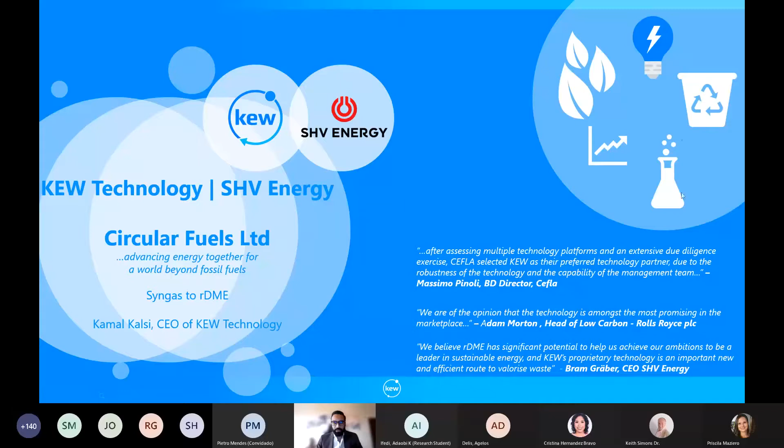Next slide, please. Okay, so very briefly, KEW Technology - we're a pressurized gasification technology company, and our mission is to convert waste and lower grade feedstocks, agricultural biomasses and so on, which are a very important theme in this discussion regarding Brazil, into a high quality syngas vector, a gas containing hydrogen and CO, which forms the building block for doing many other things.

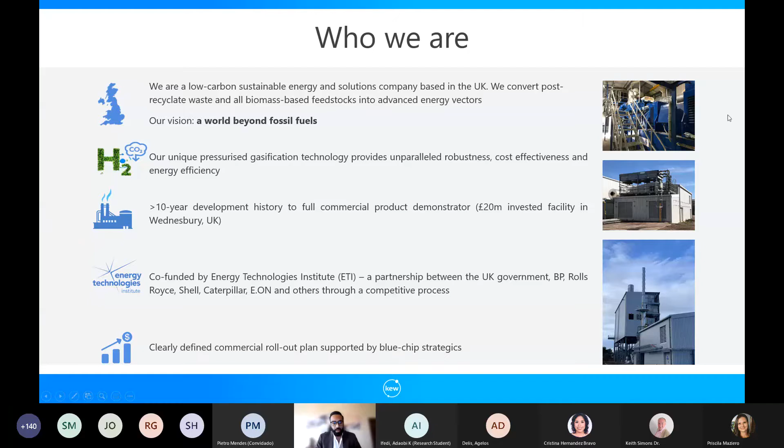We have a 10-year history that has culminated in the development of a full-scale product demonstrator in Wednesbury, near Birmingham in the UK. We've had quite a long history - next slide, please - where we were supported quite heavily by the UK government in the beginning to construct a full-scale demonstrator, because gasification as a technology route is very interesting: if you're using a high biogenic content it opens a route for carbon capture, and with even a reasonable degree of carbon capture, one can start producing negative carbon fuels.

This makes it extremely attractive, because some things which are impossible to decarbonize completely - well, a negative carbon fuel really does offset that. So we've worked very heavily, in parallel with the development of the technology itself, on understanding the market and the general flow of policy and feedstocks, and which is the right product. Are you talking about hydrogen? Are you talking about distillate fuels and making secondary fuels, methanol, ethanol? Are you talking about LPG and LPG substitutes? We've had the good fortune of working heavily across these different feedstock types and end use types, analyzing them in detail to really try and converge the technology and the product solution into what is attractive ultimately for the market.

As part of all of this, we formed some very good relationships, commercial relationships with major players - SHV Energy being our most recent relationship. We have a joint venture with SHV Energy called Circular Fuels Limited. The objective of Circular Fuels Limited is to develop commercial scale bulk DME production plants using waste and low grade biomasses as a starting point. If we go to the next slide, please.

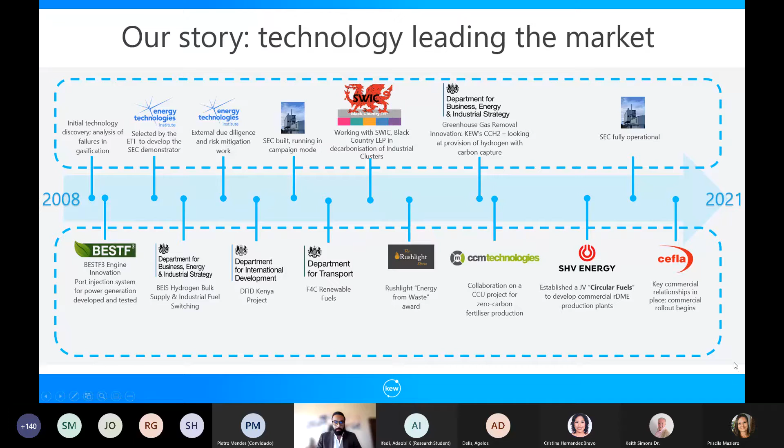So really, in terms of where we sit as a technology, we're in between two parallels. The first one being decarbonization - clearly decarbonization and providing lower carbon feedstocks and fuels is a core part of what we do. But we also sit on the other side, which is waste reduction. Waste is something that touches everybody, and this has been a very core element. Somebody mentioned earlier in the session about biomass and how we have to be careful with how biomass is used for fuel production, because it could lead to deforestation.

We are very much of the view that the feedstock we begin with has to be a waste, or an end-of-life product, whether it's agricultural waste or a municipal waste derivative product. It really has to start from that, and therefore you do not interfere with the food sector - you do not interfere with deforestation, but rather you take something that right now people are throwing away in the bin, so to speak. So really we straddle these two sectors. Next slide, please.

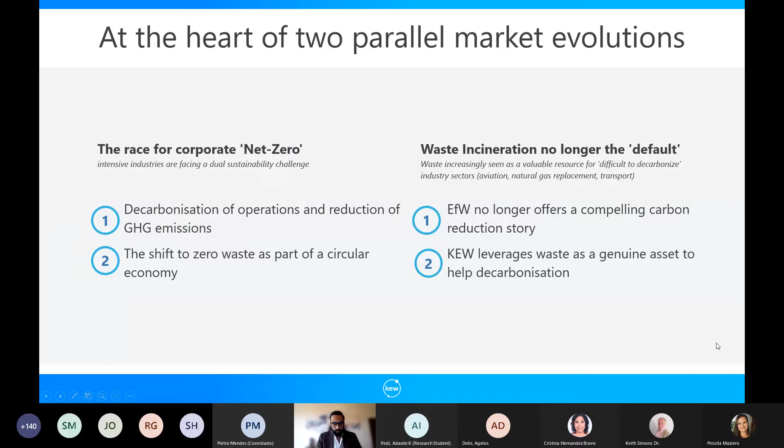So what we are able to do is take these low grade feedstocks and biomass and convert them into hydrogen and CO production gas. What is unique about the technology and the way we do it is that our gasification system is a high pressure approach, which at a smaller scale is a fairly unique proposition. There are larger coal gasification plants, of course, but those are fossil based. What that does for the technology is it allows not only some technical advantages - converting lots of different types of waste into a high quality gas vector that we can then convert into other things - but it's also around the delivery model.

So how do you build what is effectively a fairly complex plant anywhere in the world and make it cost effective? One of the key strengths of the technology is...

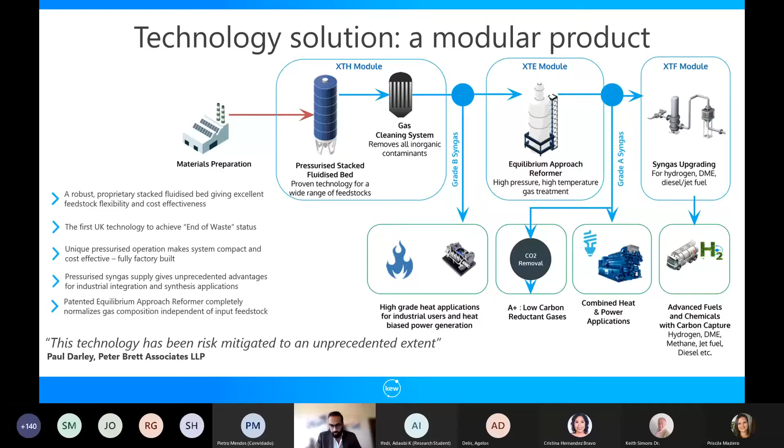Really about being able to take a very variable feedstock like waste, because one minute you have plastic, then biomass, then something else that changes, and turn it into a very homogeneous output product.

That technology, the manifestation of it, is in our plant in the UK. This is the facility in the pictures you see in Birmingham, where we have a full-scale demonstrator. As a result, we can do a lot of work proving operation all the way to a fuel end product, an end-to-end demonstration of the entire process, which acts as a key risk mitigation element in demonstrating the viability of these technologies to solve these problems.

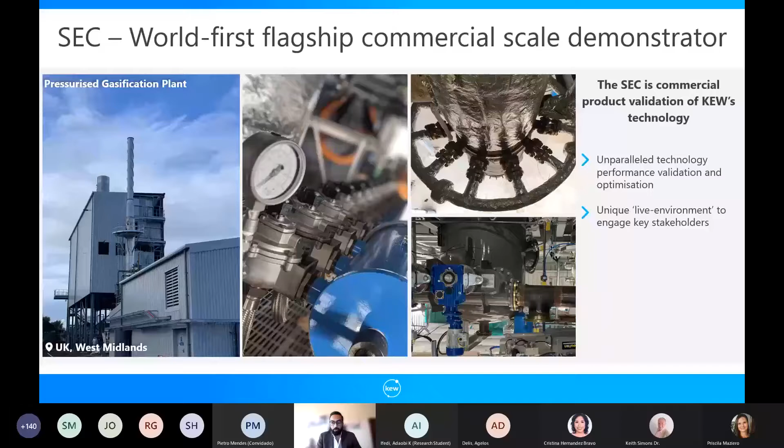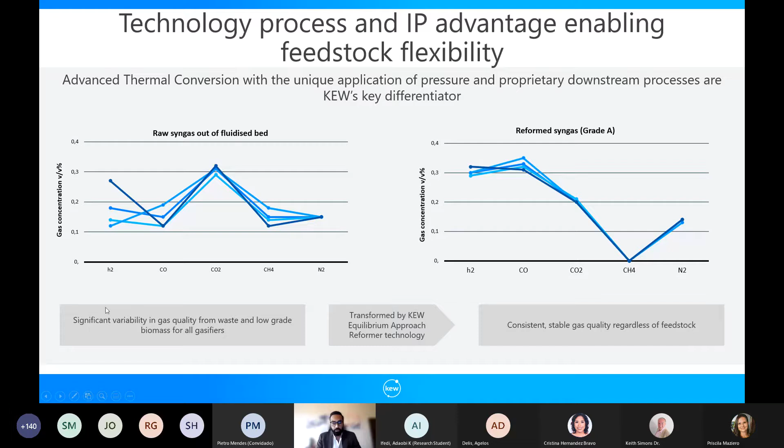This was just a very quick demonstration, and this is really key, especially in context of the discussions we've been having. The technology lends itself to using everything from sludges, sewage sludges, digestates from anaerobic digestion, refuse-derived fuel from municipal waste, or commercial and industrial wastes. We can use woody biomasses too, as long as the sustainability criteria is correct, so it's more of a commercial problem than a technical one.

We can also use other lower grade wastes, which at the moment are a struggle to do something with - for example, category 3 animal waste, hazardous wastes, which today pose health problems. The advantage of the solution is that we can take any of these things and convert them into a high value end vector.

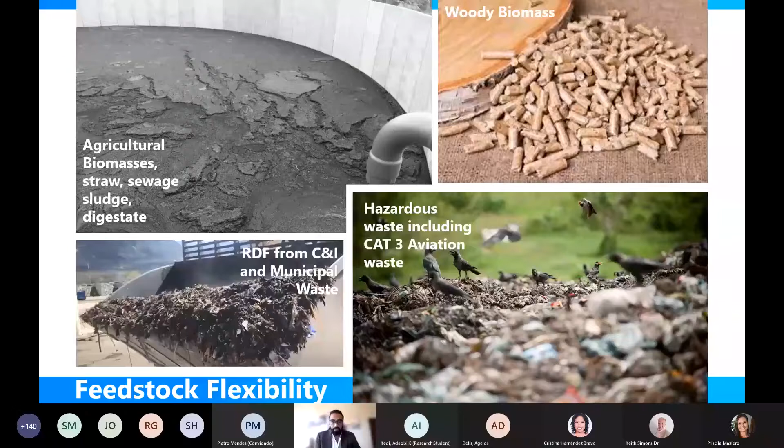As we'll see on the next slide, what is very interesting for us, and our primary focus, is on waste. Brazil generates about 80 million tons of municipal solid waste annually, and about 40% of that - quite staggering - is in controlled landfill open dump, and about 58% is in sanitary landfill. So there is a lot of landfill in Brazil, in a nutshell, and therefore a very strong need to do something better.

What we're doing right now is taking kilojoules of energy and just putting them into the ground, which are then releasing methane, a very powerful greenhouse gas, causing further damage. So there's a lot of wasted energy here, and what we're suggesting is, look, we can tap into this - we can take this and turn it into a fuel vector that cuts across.

Even though refuse-derived fuel has an organic proportion - in Brazil it'll be about 60 to 70% - the reality is, yes, there's a small fossil component to it. But a lot of it is a renewable feedstock, of renewable origin, and therefore the fuel you can produce at the end has a large renewable component. You're able to do that with a waste stream that already exists, is already there - it's just not being put in the right place.

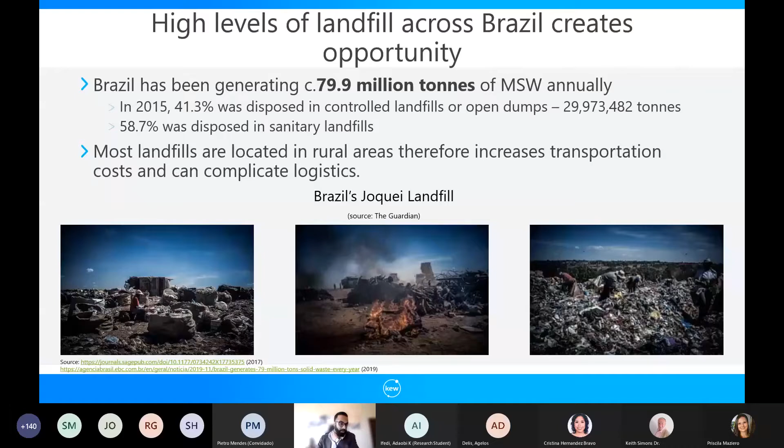If we look at the next slide, you can see there are other opportunities in Brazil as well, from agricultural residues, crop residues, sugarcane, soya, eucalyptus. I think the unique thing about the conversion route we're proposing is that, as opposed to anaerobic digestion or ethanol production where the feedstock specification has to be very tight, relying on a very specific process and feedstock to produce the end product, in our case the process is very omnivorous.

We're not reliant on cellulosic or non-cellulosic biomasses, for example, for our process - we'll just take anything and everything. That makes it very effective and very flexible to deploy in a distributed format. It's a very large country, and the production of these feedstocks is geographically very dispersed, so having a technology that can deal with that is quite essential.

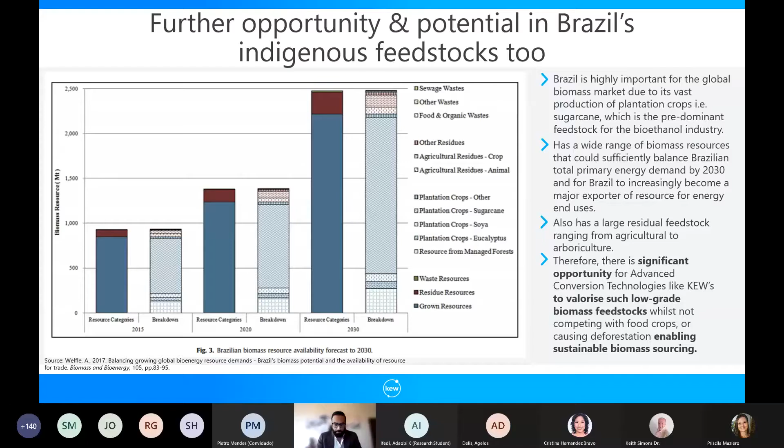Waste is an excellent feedstock. There's a lot of waste biomass that is available, and that's also a very good feedstock. It's sitting there, it's energy that currently right now people are either burning or burying. So there is a better way of dealing with this.

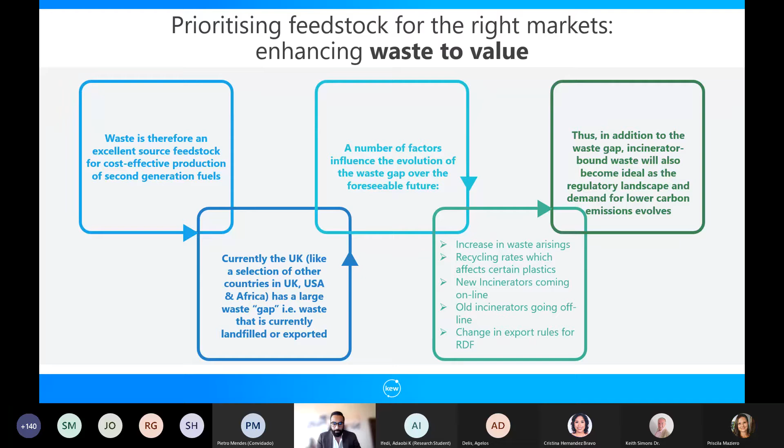This is just a short note on incineration. Obviously a lot in Europe especially, incineration is a primary mechanism for disposal of these wastes. But what we're finding right now is that it's increasingly being viewed as just a stopgap solution, and there is a better way. What we're proposing here is the better way of doing it.

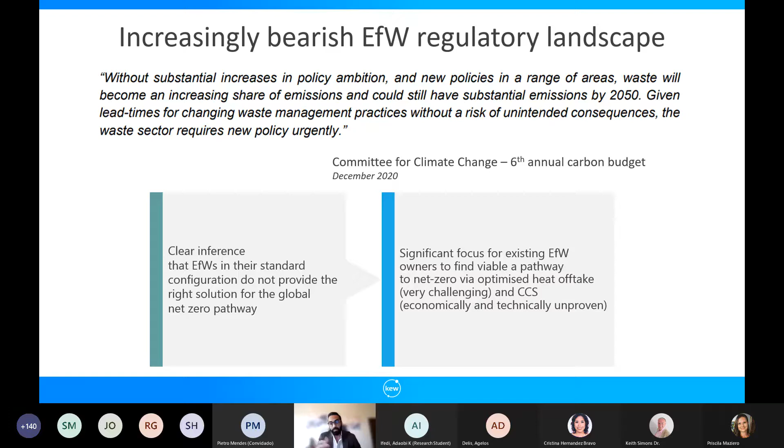Even the best incineration today takes in waste and makes electricity. Really, I would say the approach here is damage limitation — people are making electricity as a way of limiting the damage. What we're saying is, why are you making electricity when you can take chemical energy in your feedstock and make chemical energy coming out the other end?

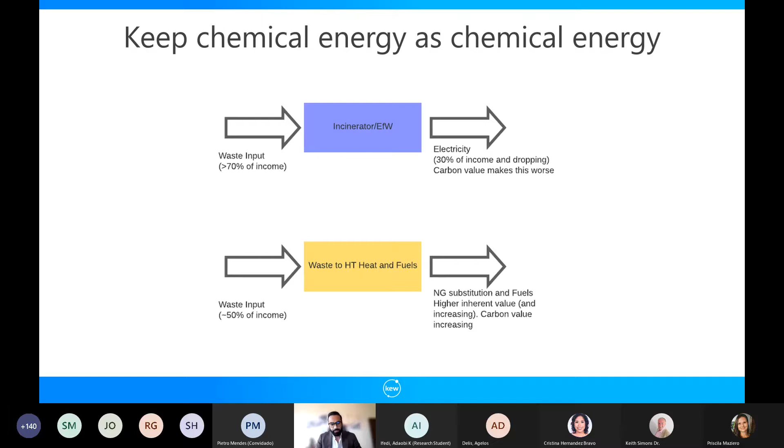Recycling and reuse is there, and that has to be there — it's a primary way of how we're going to go forward. But instead of going to recovery next, we're saying conversion is an intermediate and better way of using this energy than other approaches.

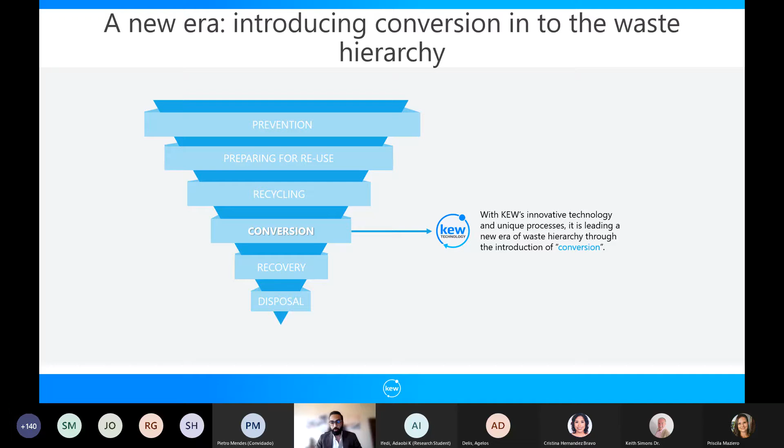This is a very important point regarding catchment areas and the relative scale of things. The typical oil and gas world of producing fuels is to make everything as big and as expansive as possible. Now the reality of how waste and biomass is produced is that the catchment areas are generally a lot more limited — you might have 200,000 to 300,000 tons.

This is a European model — you might have a bit more, a bit less in other areas, but generally the scale of your project, or the scale of fuel you produce in a single facility, is limited by the amount of feedstock you can sensibly collect. There's no point transporting waste or biomass 1,000 miles to a central facility. That really limits the scale of facility you produce, and therefore governs what product you want to be producing at that facility.

Through a very long analysis we've done, we find that dimethyl ether, DME, is an extremely good product to produce this way, because the process is very simple, very effective, very efficient, but also it lends itself to being scale efficient. Producing distillates, jet fuel for example, from this sort of process requires a much larger scale, which makes projects a lot more difficult, especially at this early stage.

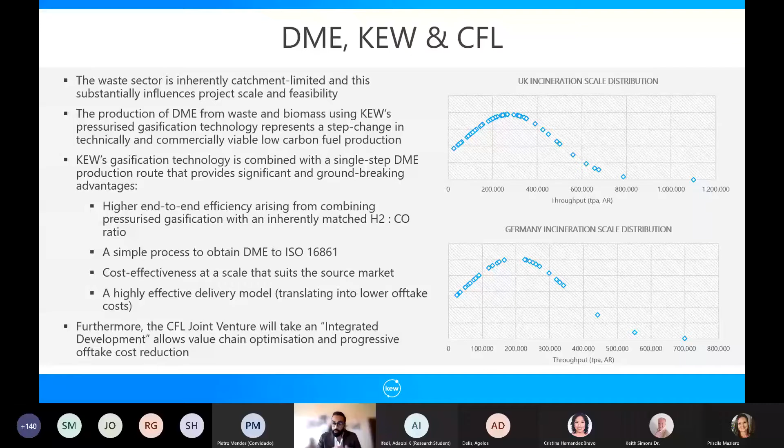DME is extremely important to LPG. In a nutshell, the key thing behind the plants we're proposing is that the DME being produced is a direct blend stock for LPG, and it's a bulk supply — not an offshoot of 3 or 5% of overall production, but plants focused and dedicated on producing DME. This is the backbone behind our joint venture with SHV Energy, which is Circular Fuels Limited. This approach allows quite an innovative way of doing it, and initially you can blend up to 20%, that's the target, eventually going to a much higher blend level.

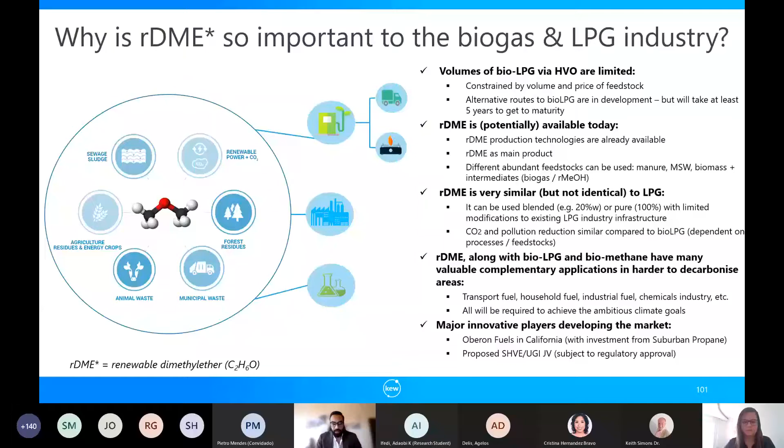The joint venture we have with SHV Energy — the objective is to produce numerous plants using waste feedstocks to produce the end product, DME. We're starting with the first project, which is currently in development. We've already completed a FEED study and are doing the next stage, in the UK. But our remit is global, and we'll be looking to develop further projects, especially in places like Brazil, where the feedstock is there, the energy is there — we just need to convert it in the right way.

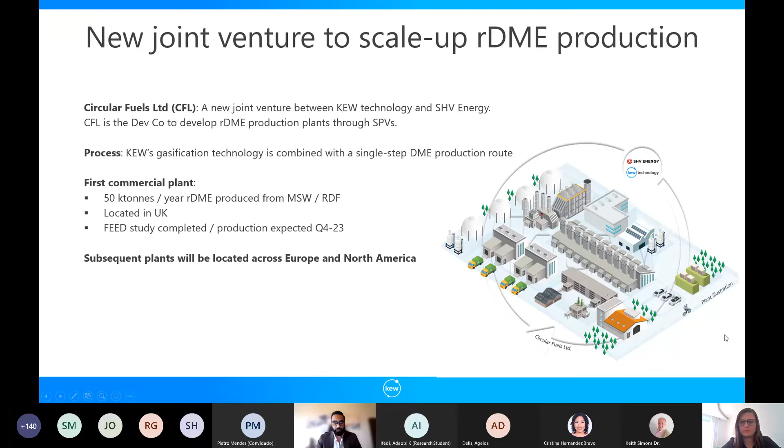To summarize, there is a very strong desire for circular economy, and we believe this solution of taking waste and converting it into a low carbon fuel solution ticks all the boxes and can also be economically viable. Our objective is fossil parity at the very least — we believe we can do better. Thank you.

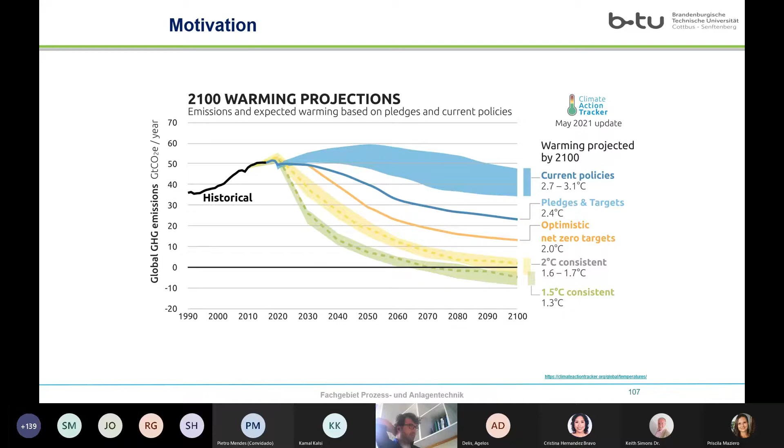The main reason that we are still talking about opportunities of using Syngas for various products is, as you see here, the predictions or projections in terms of global warming or climate change that need to be tackled somehow. One of the first reasons is the growth of the population, which leads further to an increase in energy consumption, and these follow a very close pattern.

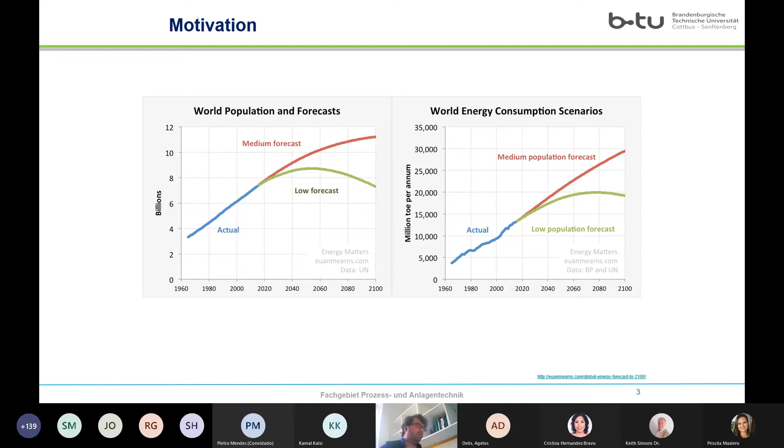For this reason, many policymakers are asking industry to improve their operation in terms of energy demand, which needs to be reduced, the dependency on fossil fuels, the reduction of greenhouse gas emissions, and increasing energy efficiency.

Now these numbers are from the former climate action plan from the European Commission, which I've seen has been updated by the Commission yesterday. For example, for the reduction in greenhouse gas, I've seen it has increased from 40 to 55 percent by 2030. So these numbers may not be accurate anymore - this is still not decided, it's just a proposal by the Commission, but things may change in the future. So we have quite tight targets for 2030 currently, which may be even worse in the future.

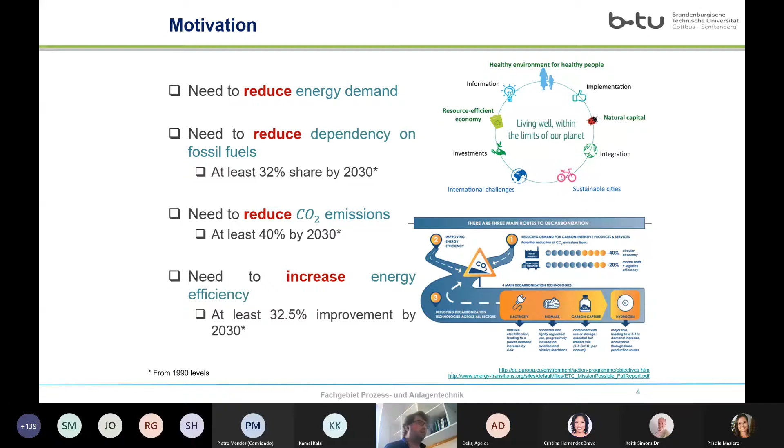Now, the main routes for achieving these targets towards decarbonization are split into three parts, as you can see in the lower part of the figure. First, one option would be to reduce the demand for carbon-intensive products and services. Second, to improve energy efficiency. Third, to deploy decarbonization technologies across all sectors of the economy.

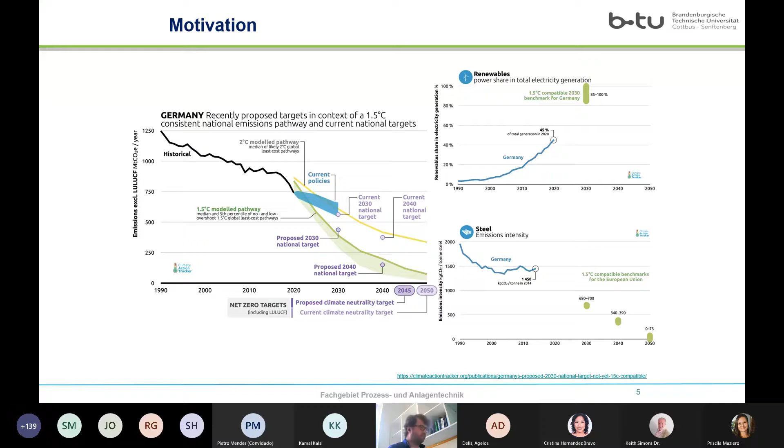So now one solution to achieve these targets would be to implement renewable energy towards low carbon energy systems, low carbon industrial systems as well. The issue with this is that in many cases the supply varies, so it's intermittent, and the best examples are solar and wind, which are very easy to understand. This intermittent supply means there's always going to be some mismatch between the supply and the demand for this renewable energy.

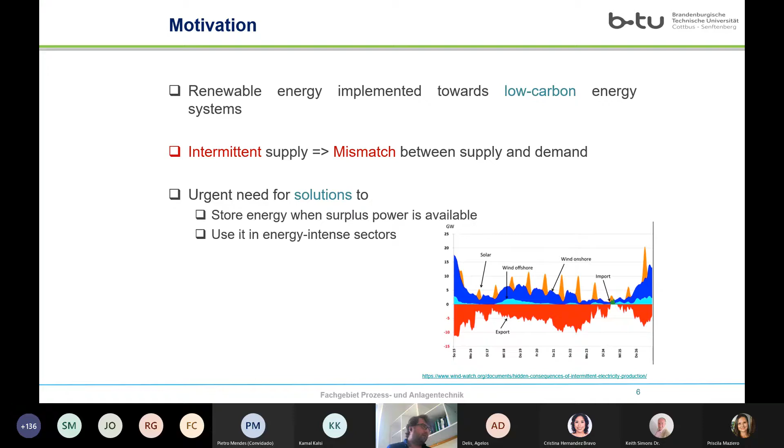For these reasons, there's an urgent need for solutions to find new ways to store energy when surplus power is available, and also find ways to use the stored energy in sectors that consume a lot of energy. Now, an approach to ensuring this comes from power-to-X type technologies.

Here you have an example which is mostly based on electrolysis. We have renewable resources on the left, use of abundant molecules like CO2 captured from various industrial sectors with high emissions, air emissions like NOx's, and water, which is abundant in some parts of the world, not everywhere. Based on this, we produce building blocks like green hydrogen, synthetic hydrocarbons, ammonia, hydrogen peroxide, and these can then be converted into more advanced chemicals using Haber-Bosch processes, methanation processes, Fischer-Tropsch, and then we obtain all sorts of chemicals.

The main benefits of this approach are, as you can see on the right of the figure, that they enable more decentralized production - we don't need a traditional central type, things are produced where the main resources are available. We can store the energy in these building blocks and then use it further to enable decarbonization.

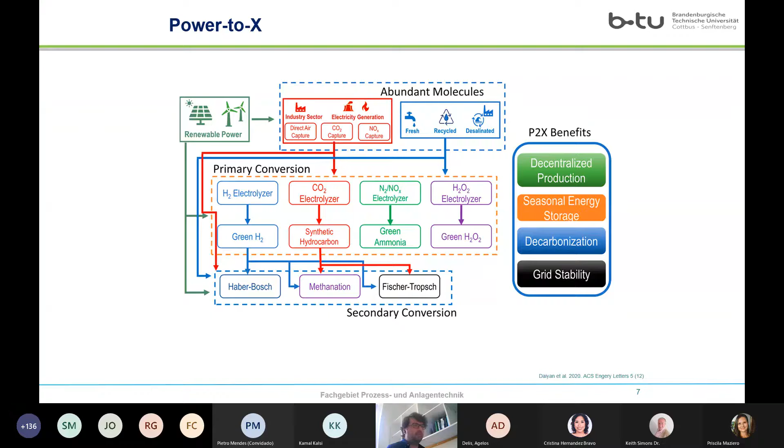Now, Syngas, as you all know, is a mixture which typically contains carbon monoxide and hydrogen. It's a building block for many processes - a crucial one.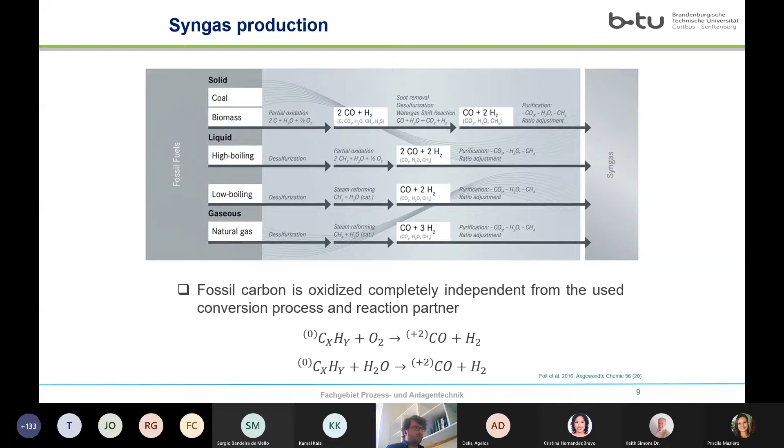However, more modern approaches consider carbon dioxide as a starting point for the syngas. Here you have an example also based on electrolysis, and depending on the type of electrolysis, we can have low temperature or high temperature. We can also use electrolysis of water to add the extra hydrogen, and we produce our syngas.

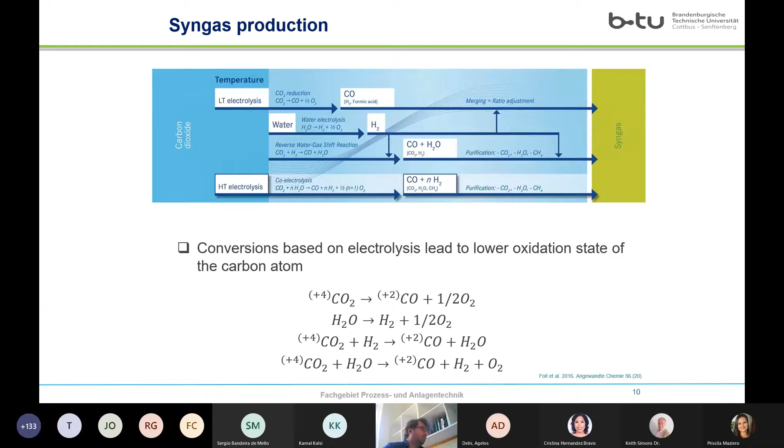Another set of approaches that will enable the production of syngas come from biomass. Using thermochemical processes such as gasification - and we had the example from the previous talk - and pyrolysis, which I think is one of the next talks. These thermal processes produce different ratios of CO, carbon monoxide, carbon dioxide, hydrogen, lower

carbon, hydrocarbons, and many other things. But of course, the main feedstock for the further processing would be the syngas, so our hydrogen and carbon monoxide combination.

Now, as I mentioned, from gasification we may also obtain CO2. Again, we can use the reverse water gas shift to convert CO2 to syngas, which may also require some additional hydrogen, because it's possible that the hydrogen we have from the process may not be sufficient. One solution would be to use the electrolysis of water, which will give us the extra hydrogen and also provide us some oxygen, which can be used in the previous thermochemical process for the processing of the biomass.

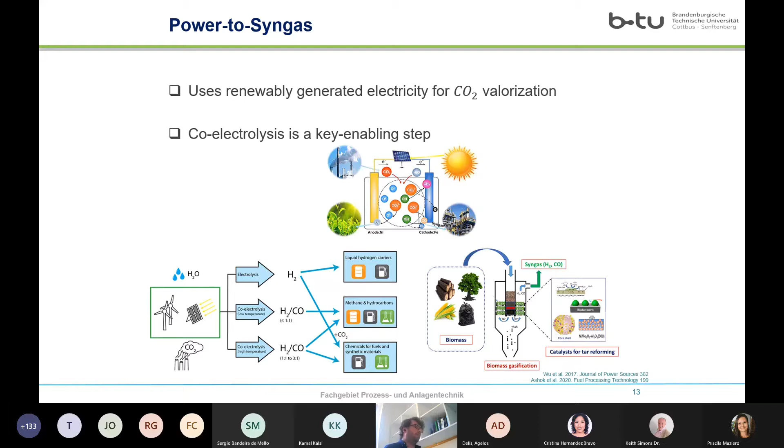Now, there are some challenges. Some of the challenges that need to be taken into account are the development of new catalytic and reaction systems. I mentioned that for the CO2 or the product gas of the thermochemical processing of the biomass, we need to use the reverse water gas shift to convert the CO2 into CO. This means that we may need to develop new catalysts to achieve this efficiently.

Then we need to use process intensification types of operations to produce new reaction systems or other units that are required in the process, and you see here some examples of microchannel reactors.

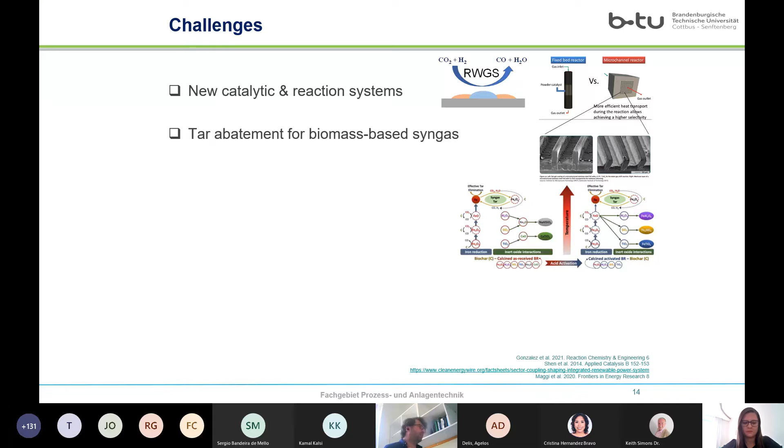If you go 2 slides back, please. No. Yes, no, before. Where it's only the new catalytic and reaction system on the slide, please. One extra before. No, Mr. Ogden? Yeah, I just asked you to try to finish, mainly, okay, because we are... Okay, no, I wanted to say...

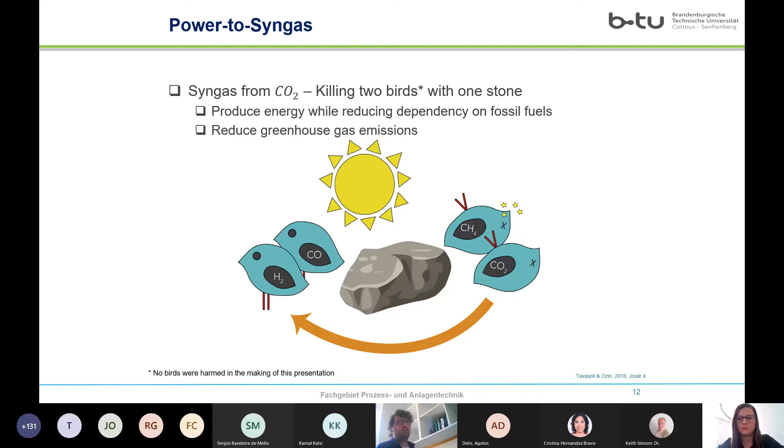because one other reason why it's important to investigate further is that usually the catalytic systems are developed for lab-based or lab recipes of syngas, and industrial ratios may differ. There is a figure there where we show, based on our research, the impact on the catalyst and the

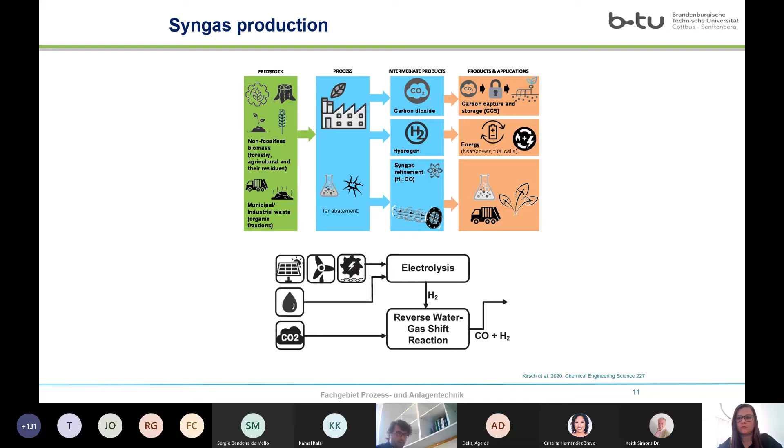reaction. Then, besides this, we need to integrate the new processes into the current technologies or current systems, not only with the energy coupling, but also biorefinery type of application, other supply chains for the fuel, supply chains for the biomass. And finally, digitalization - we also need models for the reactors, for the supply chains, for the whole system.

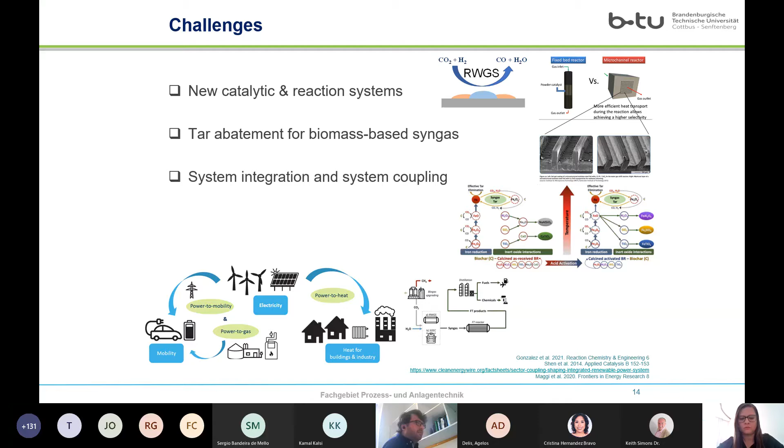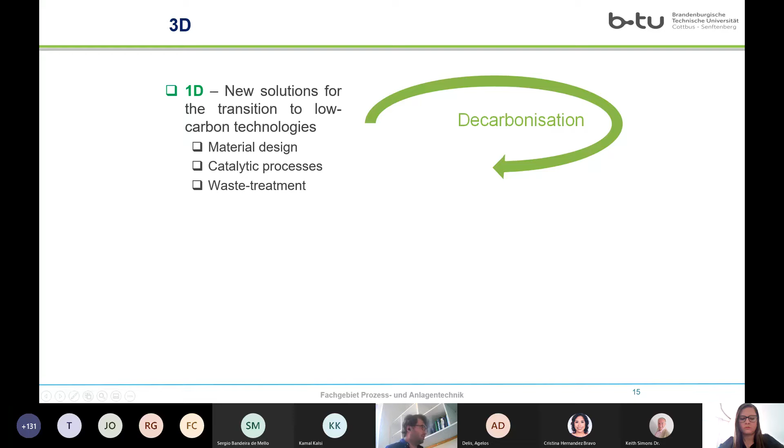Our idea to follow this is a 3D approach, which is the last slide, where we start with the decarbonization by developing new solutions for low carbon technologies. The second will be the decentralization, shifting from centralized to delocalized networks, and here again from biomass supply chains to biofuel supply chains.

And there was a discussion in the previous case on how Brazil will handle the fact that they have different resources across the whole place, so decentralization would be one solution. And finally, the digitalization, so development of digital twins, models to handle all these developments.

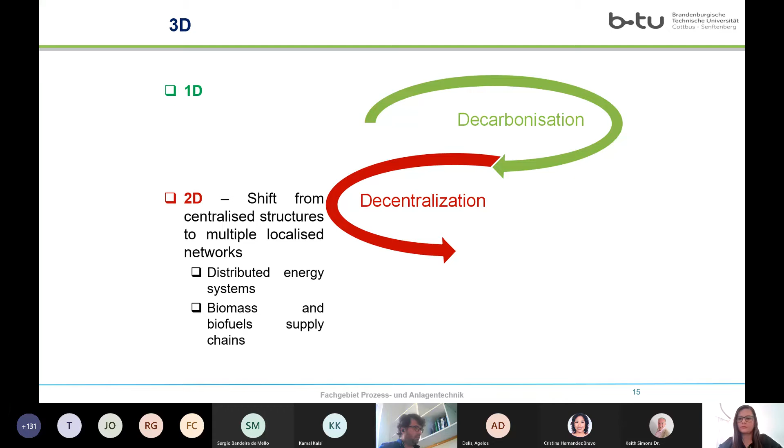This is all my talk. Thank you for listening, and I will wait for any questions.

Thank you for your presentation. So we will have questions in the discussion sessions, right?

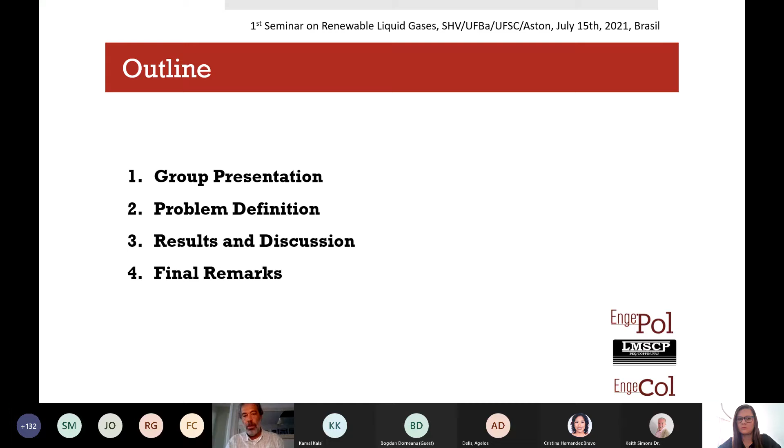So I will start with the group presentation. We are a group of approximately 50 researchers working in the general field of polymerization reactions. We are 4 professors, and there are about 40 to 50 graduate students working around. So it's a very large group working in this field.

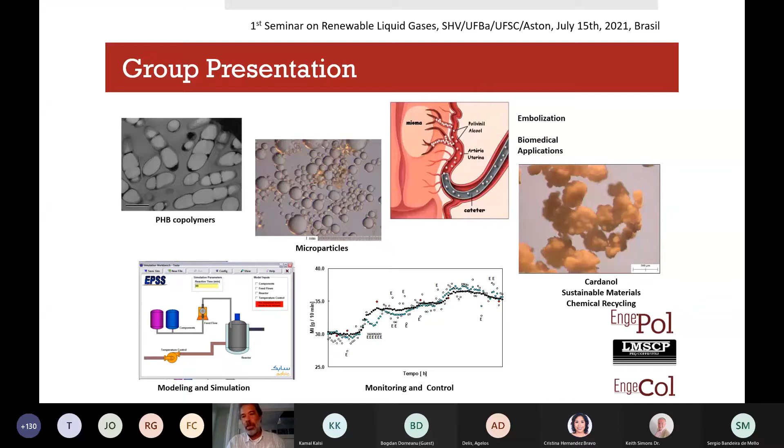We have a small pilot plant that allows the production of about 200 kilos of polymer materials per batch. This is very important for us because it allows the scaling up of the technological solutions that we develop in our group. This pilot plant is supported by some very important institutions that work in the biomedical field in Brazil, such as Fiocruz, which has been fundamental in the COVID-19 crisis in Brazil at this particular moment.

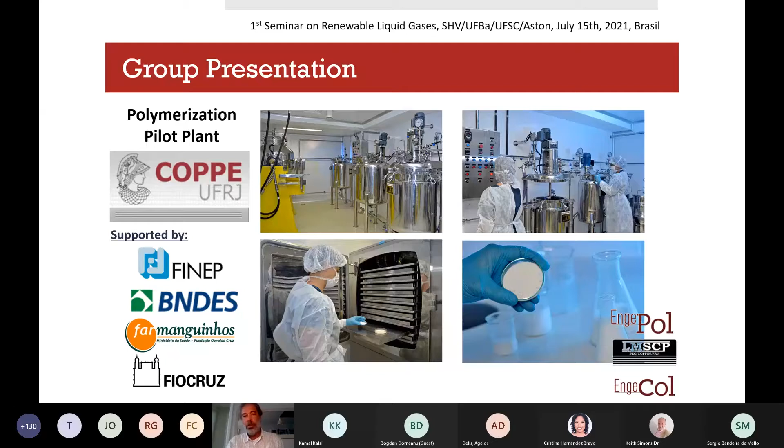As you all know, plastic wastes constitute a major problem for those working in the field, and we cannot neglect the accumulation of plastics in the environment and in landfills. For this reason, we have been working quite a lot in the particular field of chemical recycling in order to transform plastic wastes into valuable chemicals that can be used in the chemical chain, and we can certainly include LPG among these many valuable products that can be obtained from plastic wastes.

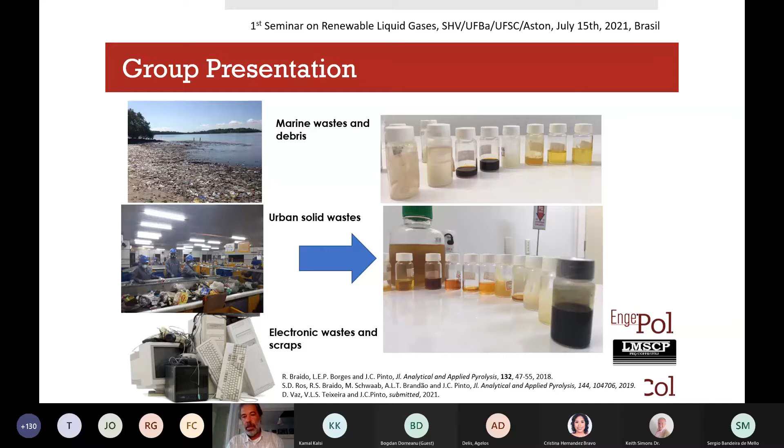We count on a small pilot plant, actually with a capacity of 10 liters, that we use to produce larger samples for characterization performed most of the time by partners who work with us in some research projects. And we are now working on a plant that will have the capacity of 100 kilograms per hour in order to process the plastic wastes that are generated by the Federal University of Rio de Janeiro daily on the university campus.

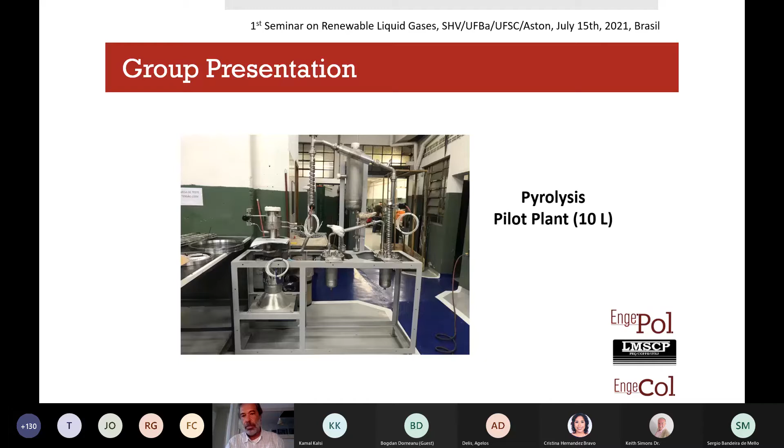I would like to present some general definitions so that we can have a common vision of the problem. First of all, we must definitely say that the problem of plastics recycling and use of plastic wastes must be 100% aligned with the principles of circular economy. So basically, we would like to keep the carbon atom circulating in the chemical and economical chain and see the wastes as a usable feedstock for manufacture of other chemicals. This is very important, and I believe that when we talk about manufacture of LPG from wastes, we must definitely take into consideration the fact that the process must follow the principles of circular economy.

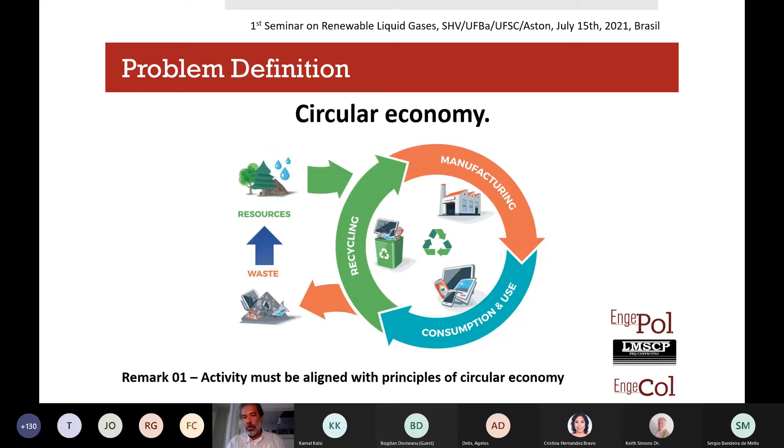When we talk about recycling of plastics in particular, there are many opportunities for reuse and recycling of these wastes.

We all know very well that the field of mechanical recycling is very well developed, but we see many opportunities regarding chemical recycling, which is the main topic discussed here by the experts present in this meeting. It's important to say that only approximately one third of wastes can be recycled mechanically, so we must develop feasible chemical routes that may allow recycling of wastes through chemical processes.

We can certainly also talk about energy recycling, and in a certain sense the manufacture of LPG regards this particular recycling route, connected to the use of energy stored in carbon bonds. One point in this figure is that it emphasizes there are many possible alternatives for use of plastic wastes, and therefore all these alternatives must be considered simultaneously and compared to each other when a particular solution is developed.

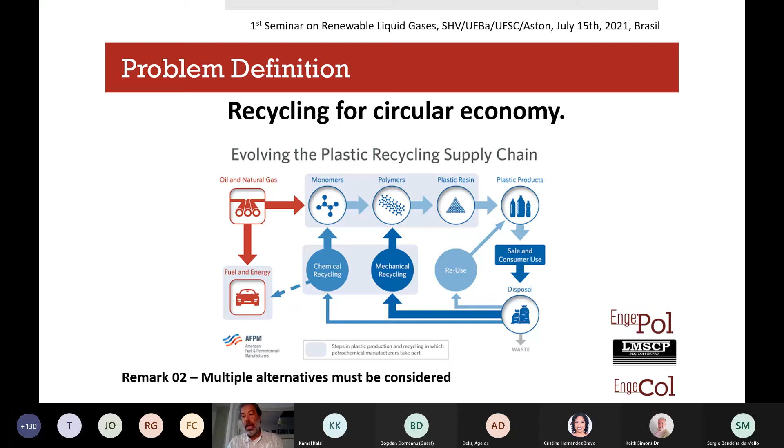A very interesting point regarding plastics is that many plastics can be used to capture and store carbon dioxide in the solid phase. This is very interesting because in the case of plastics we definitely have the opportunity to close the carbon dioxide cycle, and this must also be taken into consideration by those interested in manufacture of fuels in general and LPG in particular.

Another point we can see in this figure is that recycling of plastic wastes also gives us opportunities to manufacture hundreds of different chemical compounds. Therefore, when talking about LPG or any other product, we must necessarily take into consideration these many alternatives and competitive products in order to design feasible processes, both in terms of economical aspects and environmental impacts that the process may cause.

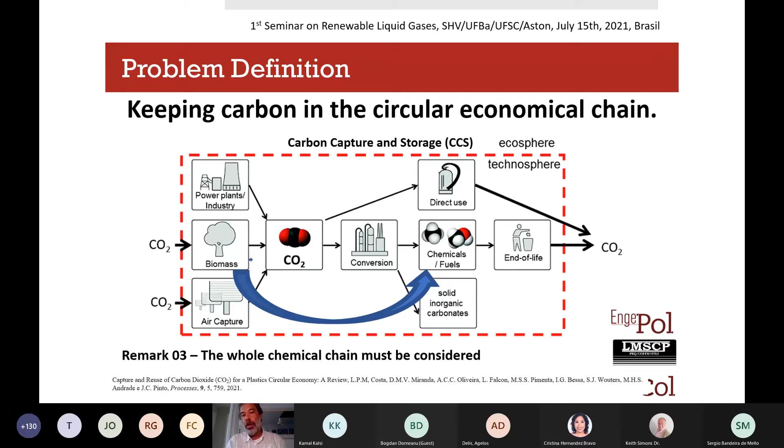Please, next slide. I would like to emphasize that we engineers - I'm a chemical engineer - are very good at making mass balances, energy balances, momentum balances, but we are generally not so good when talking about environmental impacts. We must necessarily consider that processes must be simultaneously economically and environmentally competitive.

The fact that you are recycling a material does not mean necessarily that it's good for the environment. That is a confusion made by many naive engineers who think that only because they are using wastes, the process is appropriate or adequate. We must necessarily make all the environmental balances before deciding for a particular chemical route or production of a particular chemical compound. Please, next slide.

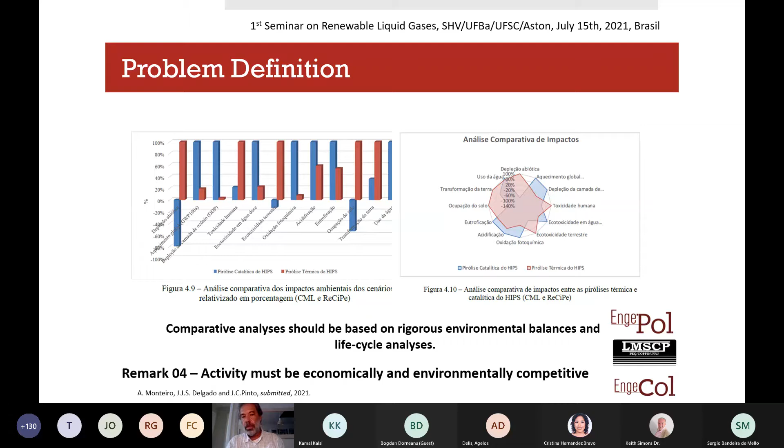Whenever possible, we should use feedstocks as available naturally. In our case, we should be able to use plastic waste that is contaminated. We already know that cleaning, separation, purification many times leads to a very bad process from the point of view of environmental impact. So feedstocks should be used preferentially as available in nature, in the case of wastes, as usually available in most landfills.

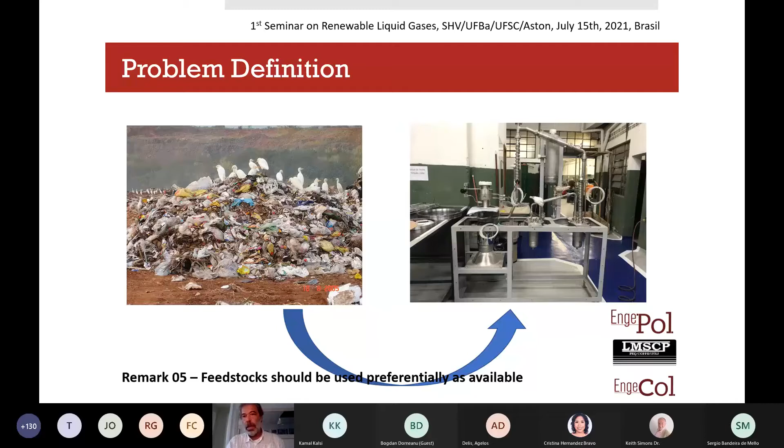Please, next slide. So I would like to present some general results and additional remarks. Next slide, please. One point is that when talking about using plastic wastes for manufacture of chemicals in general and LPG in particular, if we are using wastes as available in landfills, these wastes are certainly contaminated with biomass. So if we intend to understand the process and the products we will obtain, we must also understand how pyrolysis of biomass will perform in a real chemical process.

The pyrolysis of biomass leads to huge amounts of aqueous phase, or materials and compounds soluble in water because of the amount of oxygen contained by the biomass, and also leads to huge amounts of solid materials that contain minerals in general that are present in most biomasses.

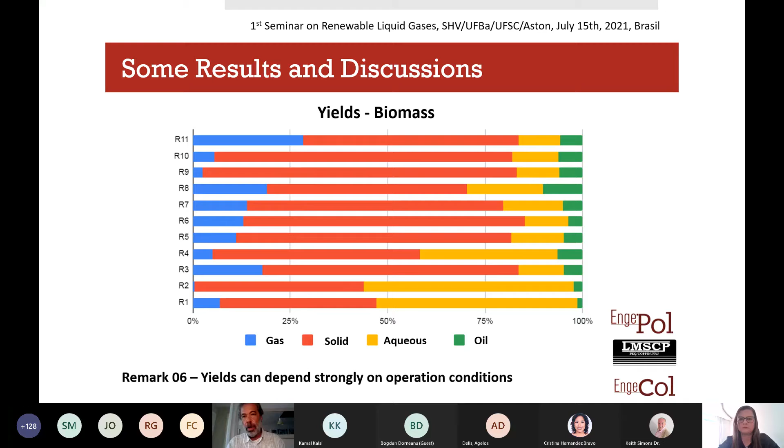It's not only the fractions that are subject to significant variability, but also the compositions of each particular fraction. We see that the amounts of carbon dioxide, hydrogen, and methane are also subject to significant variations as functions of the operation conditions.

One important point is that biomass leads to significant amounts of carbon dioxide in the final gas. This carbon dioxide should be removed from the gas or might be used as feedstock, as discussed in the previous presentation by Bogdan. In fact, the manufacture of syngas from available carbon dioxide streams concentrates most of the patents produced in the field of carbon capture for chemical manufacture nowadays.

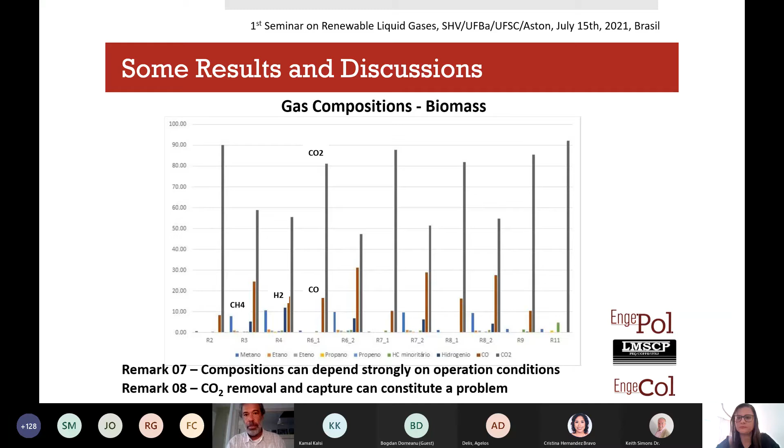We see similar variability in the liquid fraction. One problem is that the liquid fraction contains oxygenated compounds that lead to significant reduction of the burning power of the oil. This should be considered, especially one important field of investigation regarding the development of catalysts that can remove these oxygen atoms from these chemical compounds while still keeping them in the liquid phase.

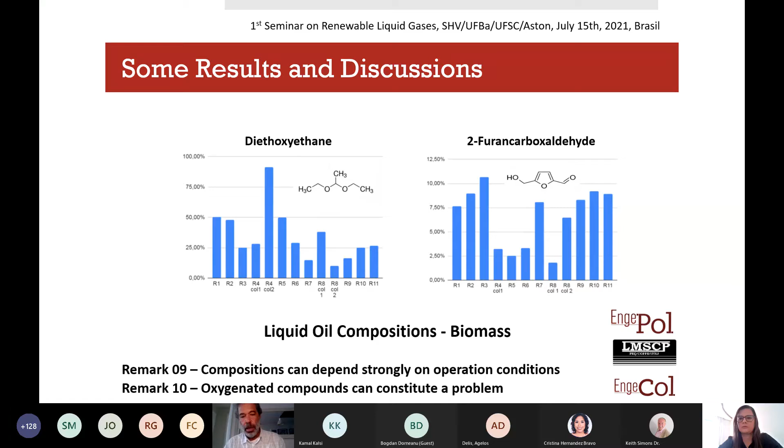We see some variability in the liquid phase, the same variability as before.

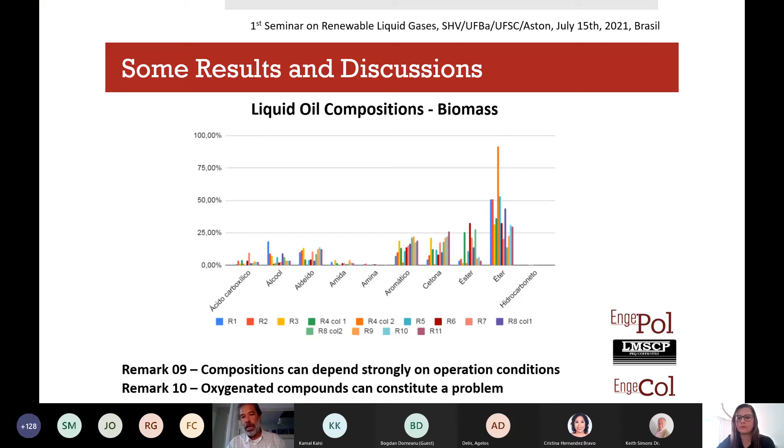When we talk about plastics without biomass, again the scenario is very similar and important. It's very sensitive to the addition of different catalysts that we can use to modify the pyrolyzed stream. So the catalyst exerts a fundamental role in this particular process.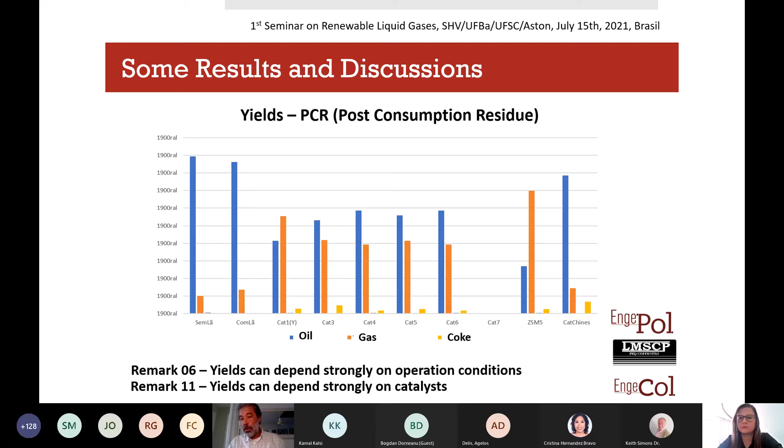Once more, we see the variability of chemical compositions and chemical yields, again as functions of the catalyst.

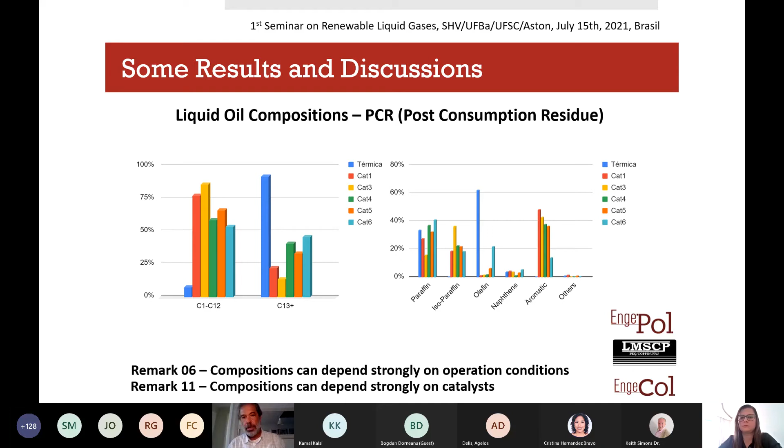When we talk about biodegradation and the use of microorganisms to produce these streams, there is a lot to do in this field, because most times the gas compositions are poor. They contain lots of methane and carbon dioxide, and it's very difficult to obtain other compounds of higher molar masses in the product stream.

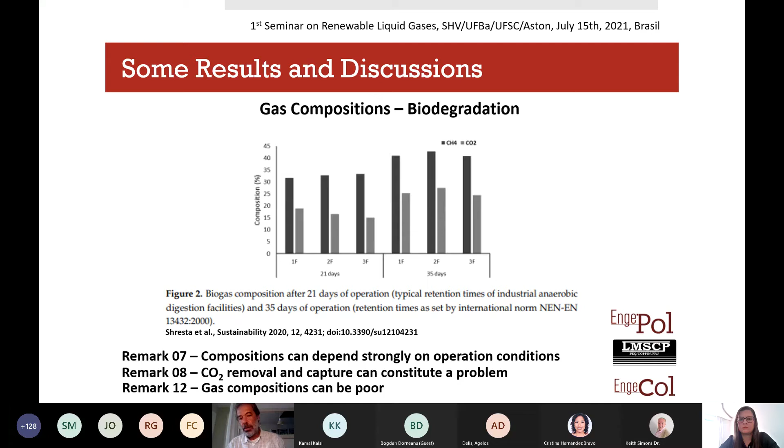I do not believe you will read this slide, but it's only intended to show that we need a particular microorganism for each particular plastic present in the waste. This constitutes a major technological challenge at the moment, because we need to engineer microorganisms that can transform mixtures of plastics, not only a single plastic material.

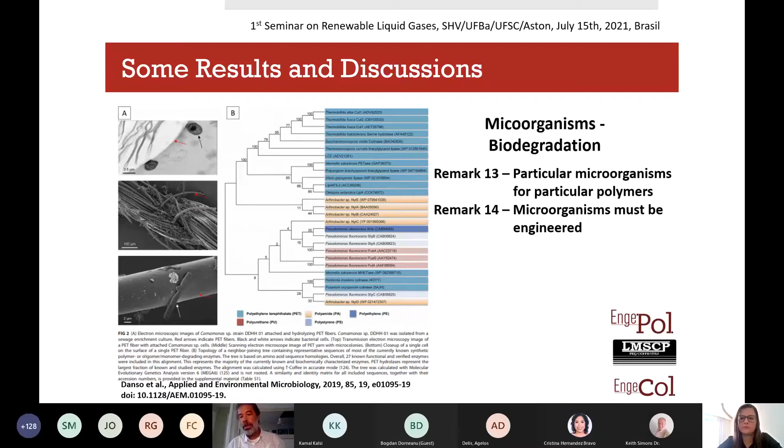All this variability leads necessarily to opportunities for design of different flow sheets and optimization. It's important to say that nowadays there is no single flow sheet that can be used for manufacture of products in general obtained from the pyrolysis of plastic wastes.

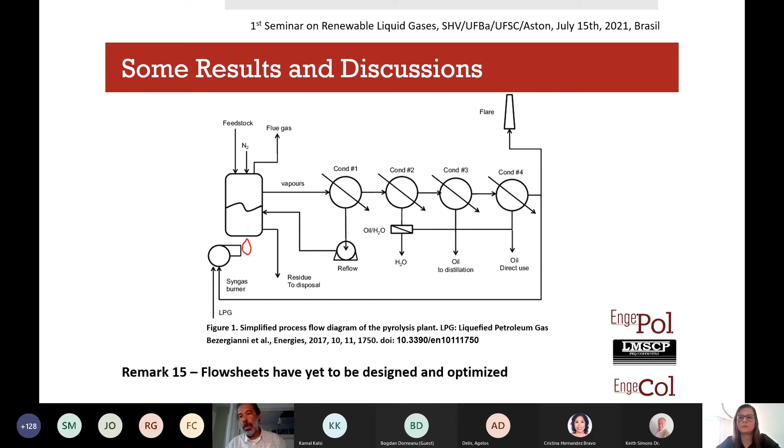My final remarks: plastic wastes can indeed be used for manufacture of LPG through biodegradation and pyrolysis, although there are many challenges regarding separation, removal of carbon dioxide, removal of oxygenated products, development of suitable catalysts and microorganisms which can be seen as biocatalysts, and also the design of flow sheets and optimization of these flow sheets, as the yields and compositions are very sensitive to modifications of the operation conditions. Thank you very much for your attention.